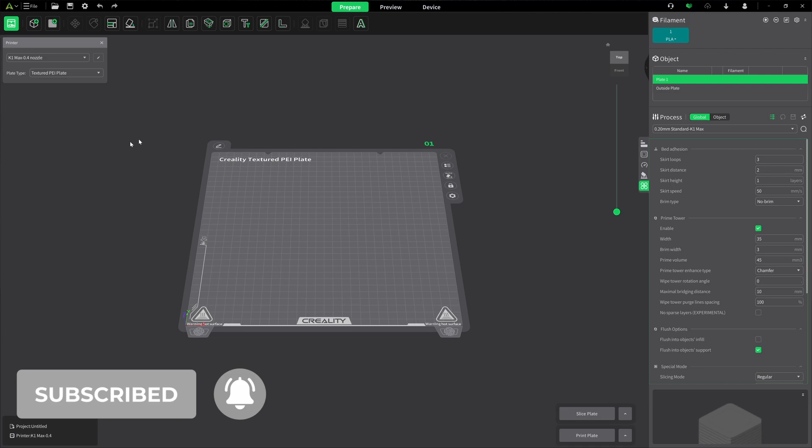Setting up our calibration here is pretty easy. The first thing I always do whenever I'm doing any calibration is hit File, New Project. That way I guarantee myself that I don't have any oddball settings still hanging out there. Maybe earlier in the day I was doing some printing and I might have made some setting changes. I would have worked with my baseline profiles. So I'm good there. I want to make sure I'm on the right printer, which is my K1 Max with a 0.4 nozzle. And my filament is my FreMover PLA.

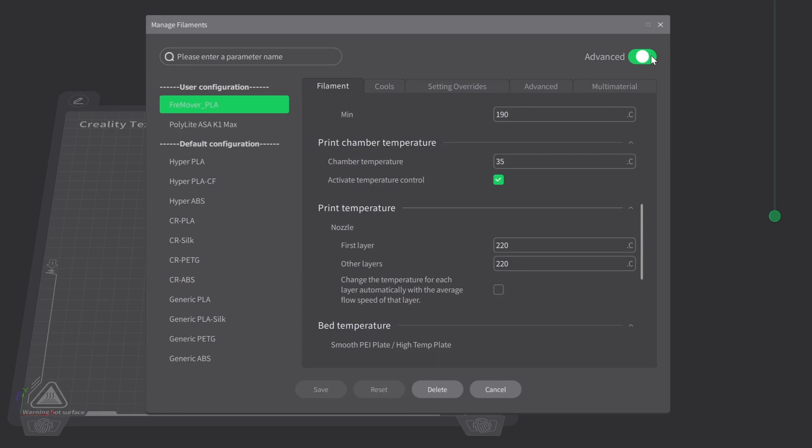While I'm right there, I'm going to check what my current max volumetric speed is, which is 18. If you're not seeing that, it could be because your advanced settings are turned off. Make sure you have those turned on so you can see what's going on. Scroll all the way down to the bottom and you'll find your max volumetric speed. I'm going to close that out and we're going to set up our calibration test.

I'm going to come up here to the upper left hand corner and click on the Creality logo. We'll drop down till we come to calibration, and then select max volume flow. We're presented with a dialog with a few simple settings. The first one is our starting volumetric speed, which is currently set to 5. You can increase that if you want. I always leave it at 5. There's no reason for me to leave it there. I just do it.

The end volumetric speed, I'm changing mine to 30. The reason I do that is I see a lot of people run this test and they'll go from 5 and end at 20, and they'll say, well, I don't see a change. That's because they're not set high enough to actually see the results.

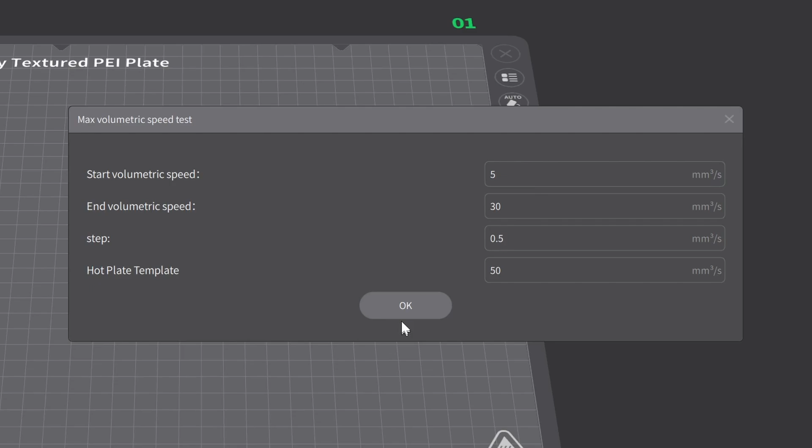I'm going to leave my step at 0.5 cubic millimeters per second. What that does for us is I will be starting at a volumetric speed of 5, as seen up here in the top entry. So I'm going 5, 5.5, 6, 6.5, 7, 7.5, all the way up until we hit the ending volumetric speed, which in my case is 30. The hot plate temperature, 50 degrees, I'm good with that. So it's basically just these 3 that you'll usually change or may change. I'm going to hit OK. It will do the slicing for us.

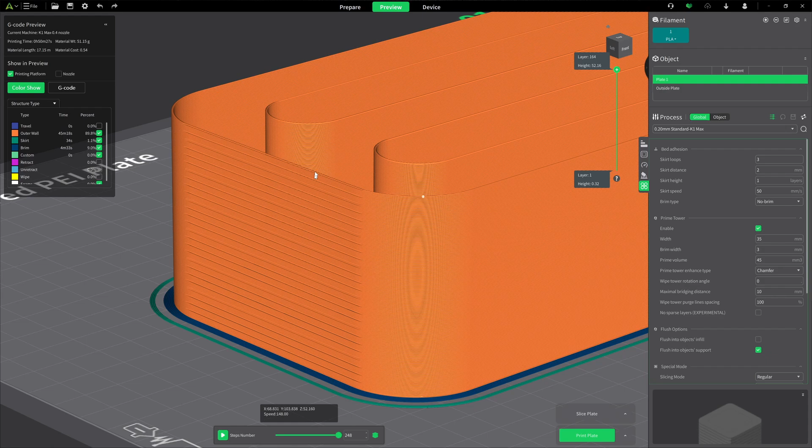And there we have our sliced test piece. And as you can see, there's not much to it. It's a single wall. Nothing exciting. We do have some indicators on the back here. So when you're looking at your finished print, you want to make sure you don't confuse these with defects. They will help you get the height and also find some defects. But I use the calipers when I'm trying to find my height.

So while we're here, let's come over and we're going to change our G-code preview. We're going to go from structure type to flow. And this gives us a better look at what's going on. Down here where it's light blue, I have a flow of 6.23 for the volumetric speed. That's millimeters cubed per second.

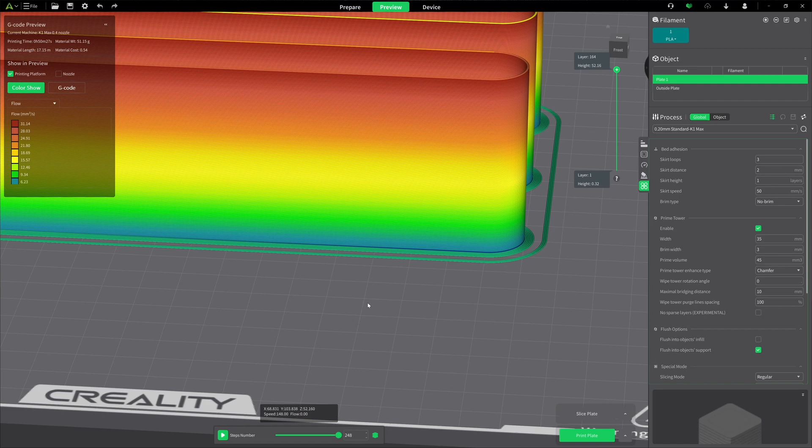And then we get up into the green. We're going a little bit more until we get to the yellow, we're looking at 15.57, all the way up until, well, it's showing red as 31.14, but we're capping off at 30. So that's where we're going to see our big changes. So you'll want to change to flow to take a look at that.

Something else you can do is go ahead and change it to speed and just take a quick look. And it almost mimics what we're doing as far as the colors with our flow and speed. You can see the speed changing. We're going from 49.6 millimeters per second all the way up to 148, where it's the dark red. So it's just something to keep in mind. It's pretty interesting stuff. I regularly check those when I'm slicing any model.

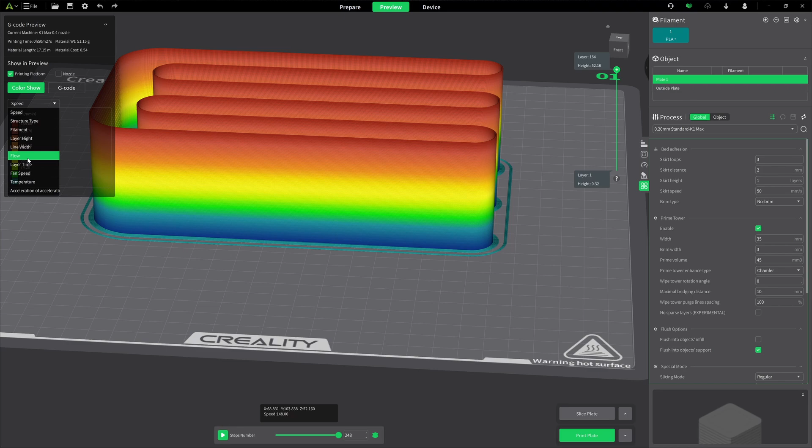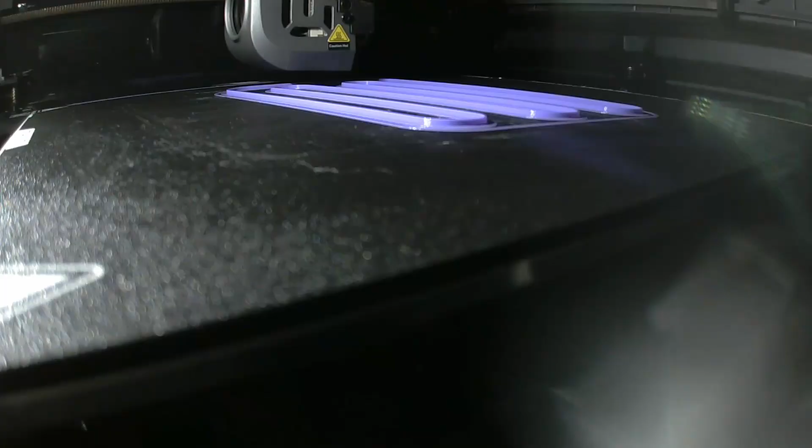I'm going to set it back to flow, and we're going to go ahead and print this out. And we'll take a look at our results on the other side. When you see the print starting to under extrude or fail, you can go ahead and cancel it. Our usable results will be below that point. There's no sense in wasting time and material when we don't need to. The test piece did better than I thought it would. I expected to see under extrusion sooner than I did.

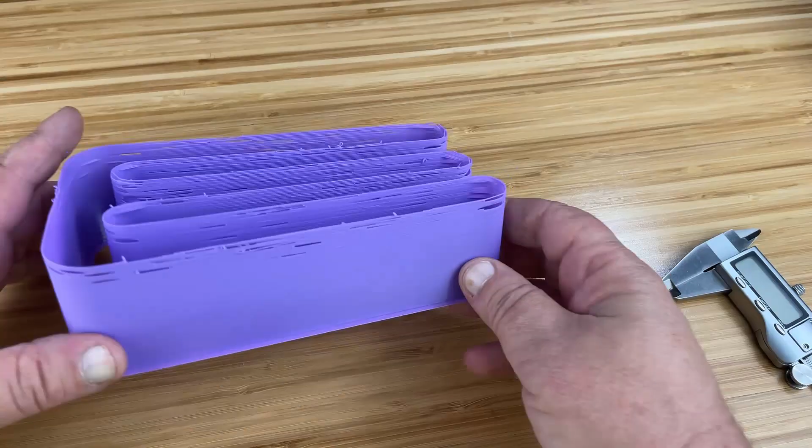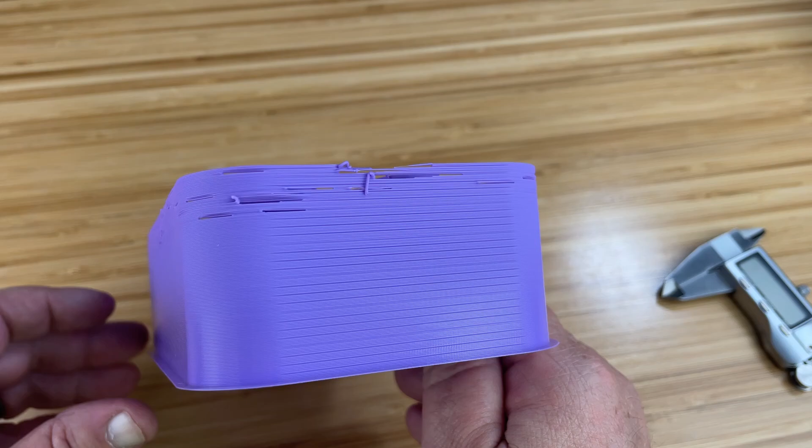Now, what I'm going to do is look for where the print starts to go bad. It's best to tilt it in the light and look for defects. Check all sides. I'm looking for signs of under extrusion or poor layer adhesion. It looks like it's starting to go bad right about here. The lines are nice and tight up until about that point, and then they're starting to spread out a little bit.

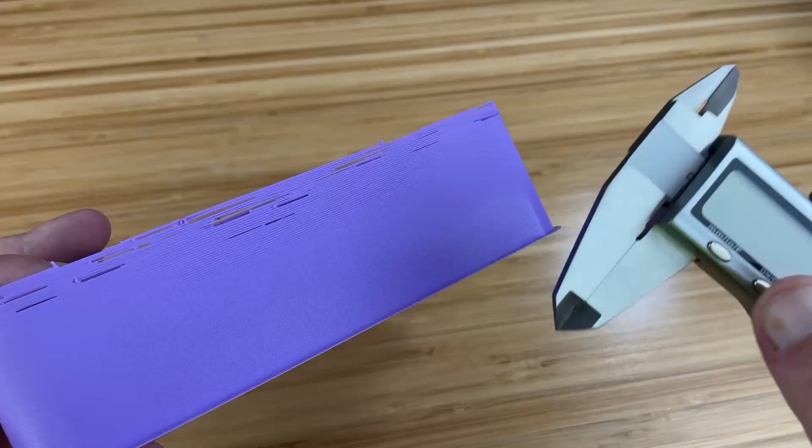Now I'm going to go ahead and grab my calipers here and make sure they're zeroed out, and I'm going to take a measurement from the bottom up to the point where the model starts to fail. And it's looking like 34.27. Let's go ahead and jump back into Creality Print, update our profile with this new information, and we'll be done. Okay, so now it's time to do a little bit of math, update our profile, and call it a day.

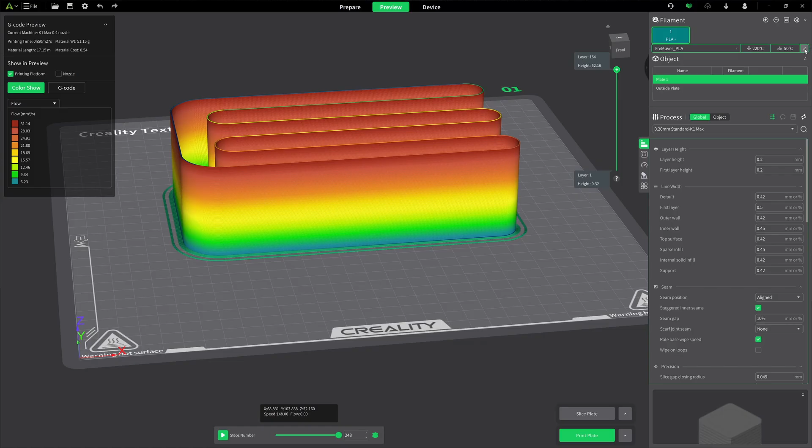What we want to do is come back up here to our PLA. We're going to click on it, and we're going to click on the pencil icon. We're going to scroll all the way down to the bottom again to our max volumetric speed. And if you remember back in the beginning, our formula, we're going to use a couple of those values. So our actual formula is our starting value plus the measured multiplied by the step. So in our case, our starting value was 5 when we set up the test. We measured 34.27 and we used a step of 0.5.

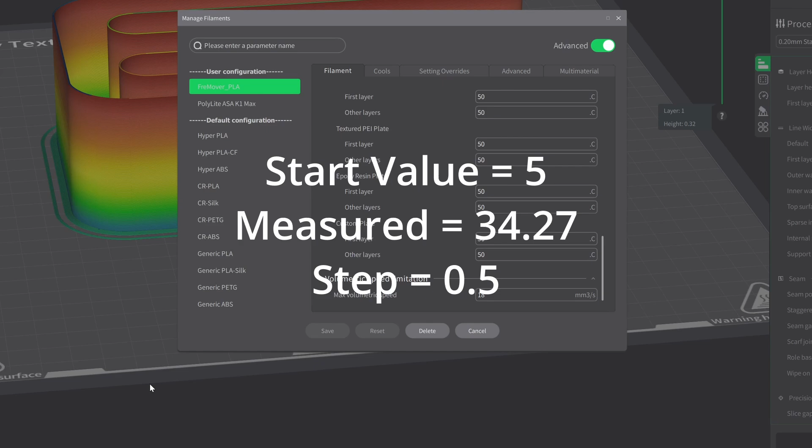So we go 34.27 multiplied by 0.5, and that's going to give us 17.135. Now we go back and we add the starting value of 5 to that for a total of 22.135. Now we could just go ahead right here and enter 22.135, hit save, and call it a day.

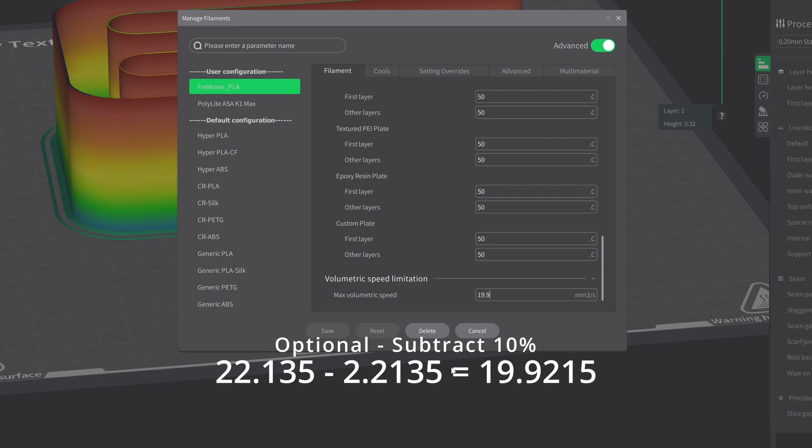What I like to do is build in a safety margin. When I measure these parts, they're a little flexible. You're trying to look for where the under extrusion starts. You might miss it by just a little bit. So I'll use 10% of my value. So I'll take the 22.135 and I'll subtract 10% from that, which is 2.2135. And that is going to give me a total of 19.9215. Actually, I'm just going with 19.92.

I could round up to 20. Or your best bet is to always round down. In fact, I'm going to go ahead and use 19.5. That way I know I'm still increasing my speed, but I'm doing better than what I had. So that's all there is to dialing in the max volumetric flow. Pretty simple. You'll get more consistent prints as you go on.

Remember, just because a hot end is advertised with a specific flow rate, it doesn't mean your setup will be able to fully utilize that figure. Part cooling, motion system rigidity, and electronics will all impact the final results. The Micro Swiss Flow Tech, that was advertised at, I believe it was 50 millimeters cubed per second. We didn't quite hit that with PLA.